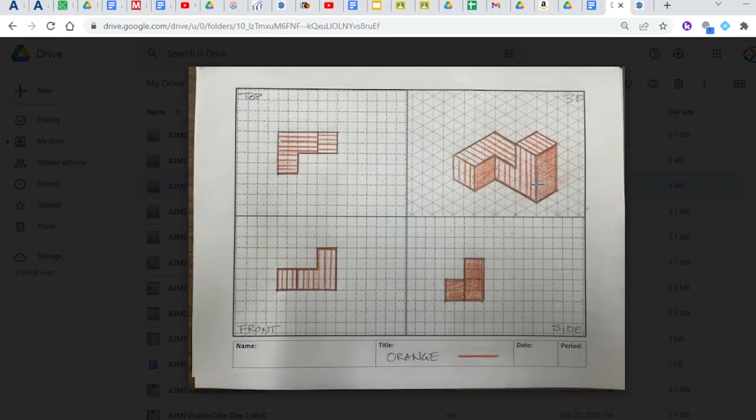I think you'll find that's probably the easiest, easier than adding. I think the subtraction method works better, and you'll see what I mean when I start doing it. So what I need to do is figure out the overall dimensions of the block. If this were just a regular rectangle, this would be 3 blocks this way and 2 blocks this way. Okay, so let's go to SketchUp.

All right, I got SketchUp pulled up, and the first thing we're gonna have to do, guys, is make sure that your measurements are in millimeters. There's a whole video on how to do that.

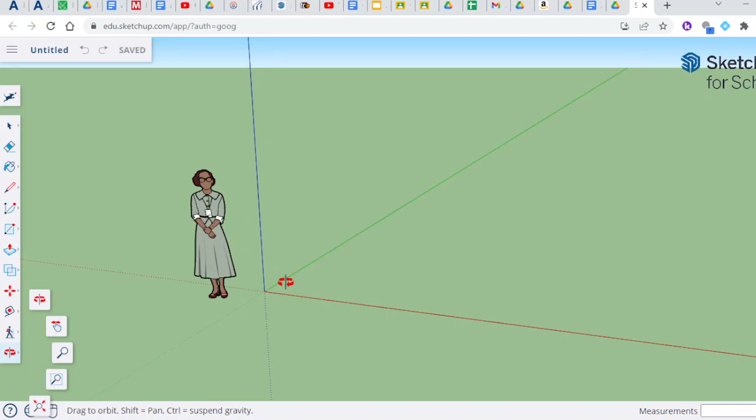Second thing you want to do is grab this orbit tool, and put it in the area where you're going to be working, which is down here in the corner. Then you want to start zooming in, and put that orbit tool in the area you're zooming to, because otherwise it will zoom you somewhere else.

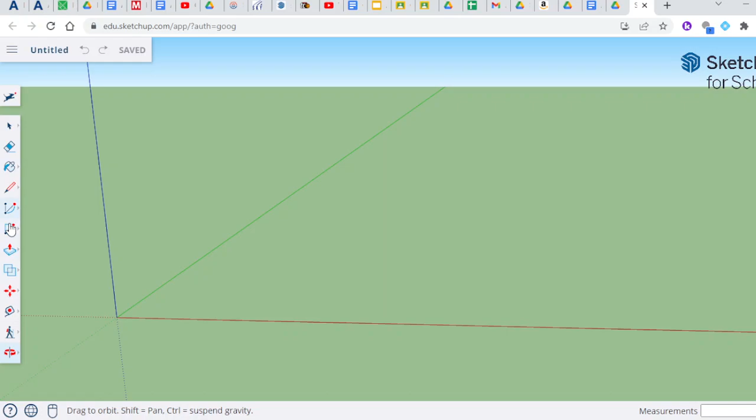I'm going to turn a little bit, go like this, move it back. We're going to keep zooming in. Now I'm going to grab my rectangle tool, put it in the corner here, move it, make sure I've got my millimeters. And I do have my millimeters.

All right, so the first piece I'm making is 3 blocks by 2 blocks. So 3 blocks is 60 millimeters, and there's 2 joints in between there, so that's 0.3 plus 0.3, that's 0.6. So I want this block to be 60.6 millimeters long going from left to right, and 40.3 going from up to down.

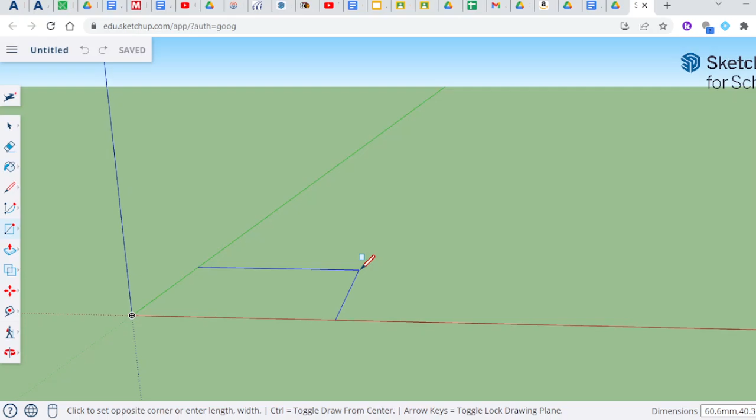So what I'm going to do is, remember when you pull on this, you just take your hand off the pad, I'm just going to put the numbers in. So I'm going to go 60.6, comma, 40.3.

Okay, and then you click enter, and this is the shape I have to work with, like if I didn't take anything out. So now the next thing I'm going to do is grab the push pull, touch it, and start moving it up, and the total height we're going to work with.

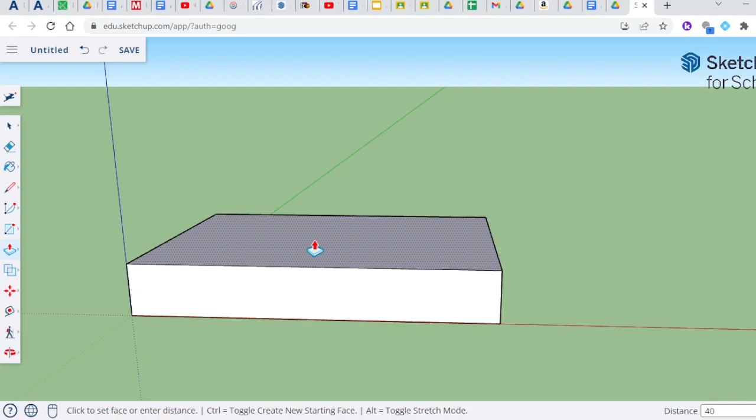This goes up a total of 2 blocks. So if it goes up 2 blocks and you have one joint between it, that's 20 plus 20, which is 40, and then that 0.3, so it's 40.3. I'm going to go 40.3 millimeters, hit enter, and we've got this block here that is freaking out right now, so I'm going to hit stop.

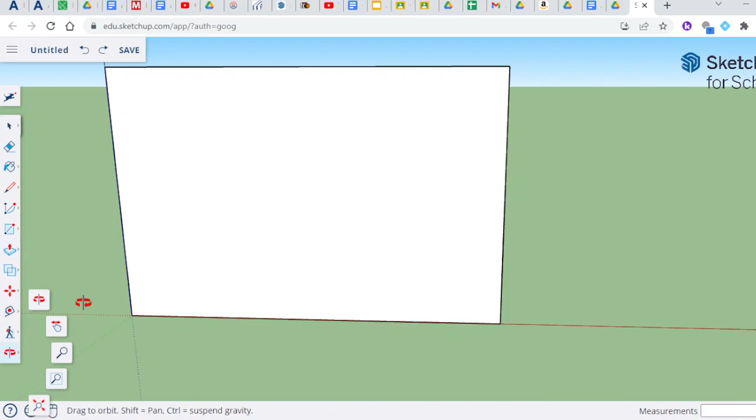I'm going to grab my pointer tool, switch over to the orbit, and pull it up like this so we can look at it. All right, so this is my block.

And if you're not sure if you made it the right size, grab your measuring tool and let's check it. I'm going endpoint to endpoint. That says oh, about 61 millimeters, right? No, it should be 60.6, right?

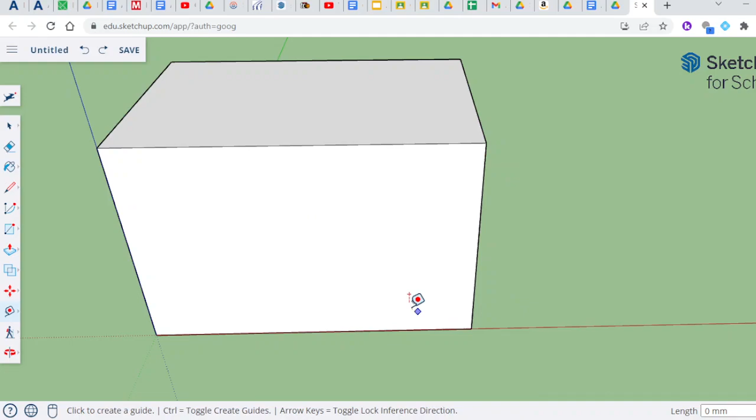Let's see, maybe it just doesn't give us those itty bitty measurements. And you go up here, this says about 40, right? Well, I know it's 40.3. I put those in, we lifted it up, everything's all good.

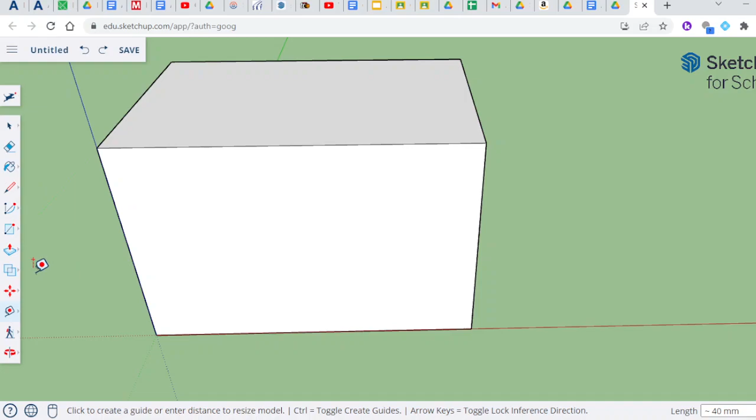So now what we're going to do is look at our shape again, and realize that it starts on the ground level right here. This is kind of my top view of what I need. I know I need nothing in here, and I also know that there's just one block sticking out here.

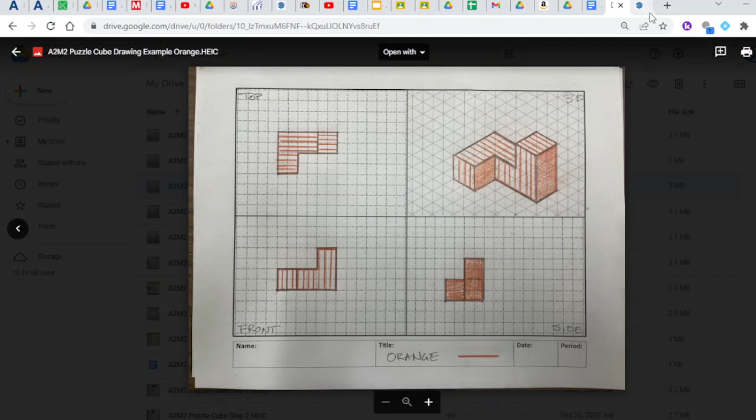So when I create this, what I'm going to do is take my pencil tool, click on it, start moving over, and type in 20 millimeters, and hit enter.

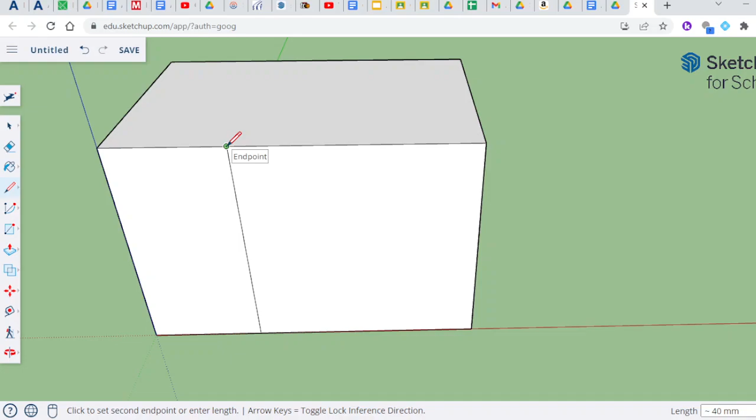And that's going to show me an endpoint right there. So I take this, click on it, and pull that down to the front. I'm going to tap on it, go back up to the top, and carry it over there.

So now I've got this kind of sections the way I need it. I know I'm going to be taking some of this out, so now let's look at the drawing again. It looks like it's one block going this way from the back, so I'm going to do that same thing, but 20 from the back.

So I'm going to go endpoint, start bringing it this way, type in 20, hit enter, find your endpoint, and carry it straight across, and make sure that thing stays red, because you know how it goes black if you move it. But if it stays red, that means it's parallel and you're in good shape.

So I'll go here, and don't worry if your lines cross and everything, we'll figure all that out and get rid of things in a second.

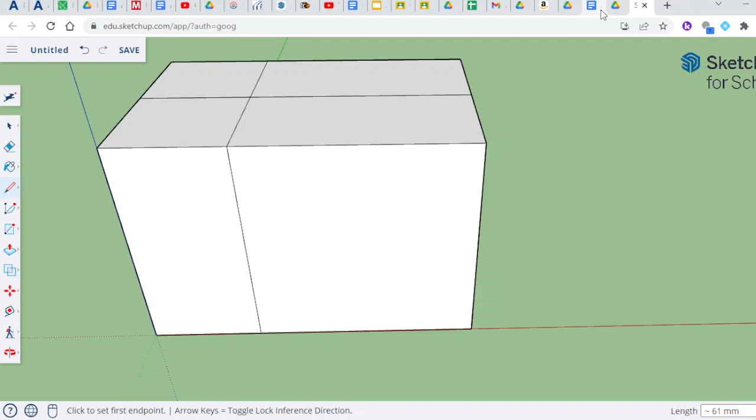Okay, so now if you look at the drawing again, you see there's nothing here, there's nothing here. So I can pull this whole piece right here and just get rid of it right away. That's what I'm going to do, I'm going to go push pull.

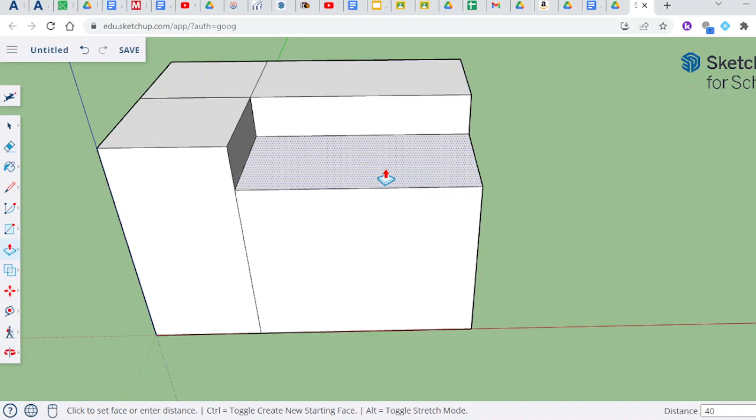I'm going to tap on this, take it and start to go down. Remember my height was 40 millimeters, so I'm going to go 40 millimeters is the distance I want to push pull it down. And when you do that, it completely wipes it out, gets rid of it.

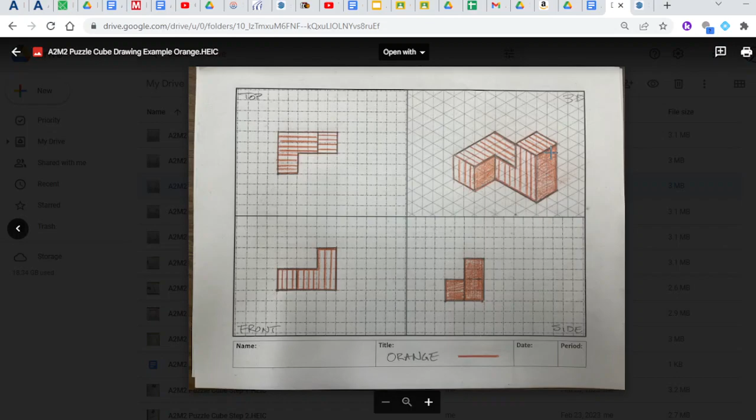All right, so we're one step closer to what we need now. Let's look at our photo again. It looks like it goes in one block here. This is 20 by 20 right here.

So I am going to grab my line tool, click here, then go over 20. I'll type in 20 millimeters, boom, and then go until I see where it's got my point. There we go, there's my endpoint. I'm going to click on it, and it should be green when I bring it across, and it is.

And then the next thing I'm going to do is take this and bring it straight down, and it should be blue this time because that's the axes.

Let's check my measurement, make sure it's right. So go from here to here, and it's 20 millimeters. So we're in good shape.

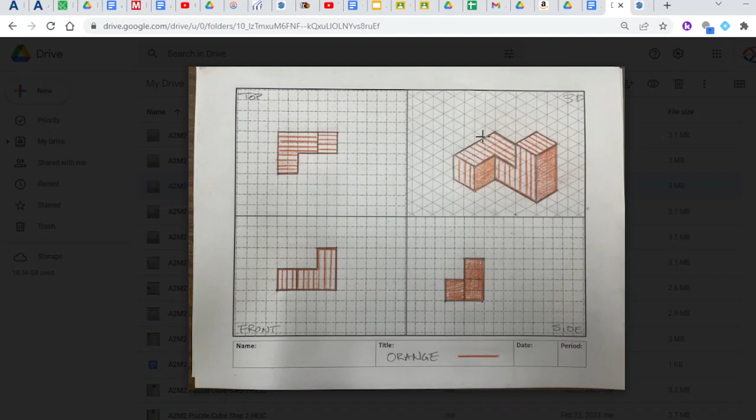Okay, so now let's look at the drawing again. We can see here that we want to get rid of all of this right here, and this is all 20 millimeters high. It looks like we've got the rest of the plan kind of set on that, so let's figure out how to do that.

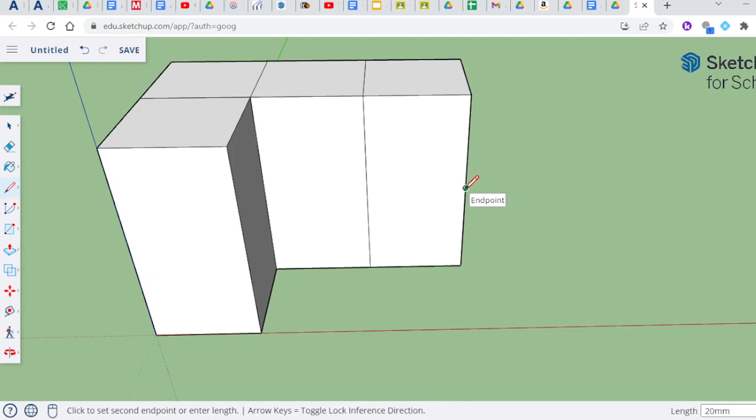So let's grab our pencil. We're going to start here, our endpoint. We're going to go up 20 millimeters because that's how high the block has to be, right? So I go up, we're going to put an endpoint here, and we're going to just take this across. We'll go right here, stop. And then we should be able to pull it this way, right? But we don't know if that's accurate or not.

So we're going to just go here, go up, and do the same thing. We'll go 20 millimeters, hit that. Take it till it comes up, puts us to the endpoint. We'll click here, go over to this, click on the edge. And now, when I click on this again, I should be able to pull it right over to this, right? And you can see it's perfect because it was green.

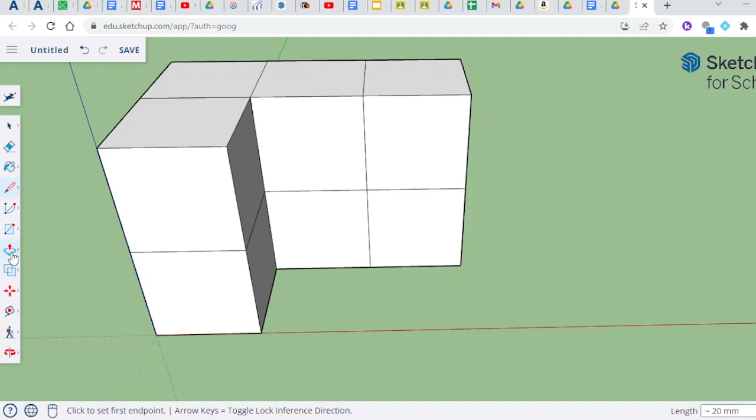So I've got enough here now where let's try the push-pull and see if we can get rid of some of this stuff. So let's take this, now this should just move this block right here. Yeah, and it does. So we know that this bottom block here has to be 20 millimeters tall.

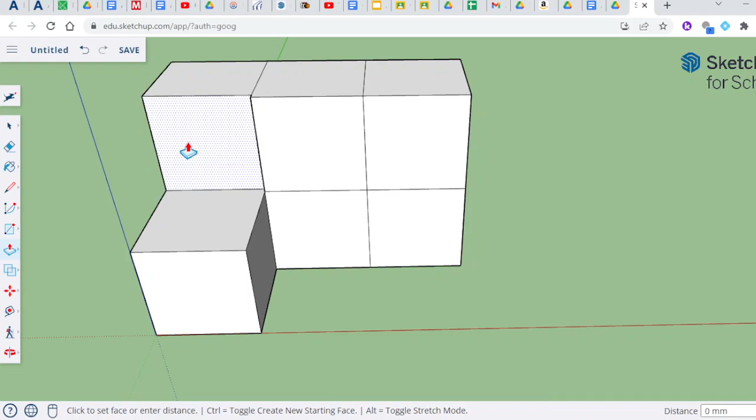And the whole thing's 40.3, so we want to go 20.3 millimeters down. And so you hit enter, and it should take us right to that line. All right, so stop on that and just hit that, right? We don't want to do that.

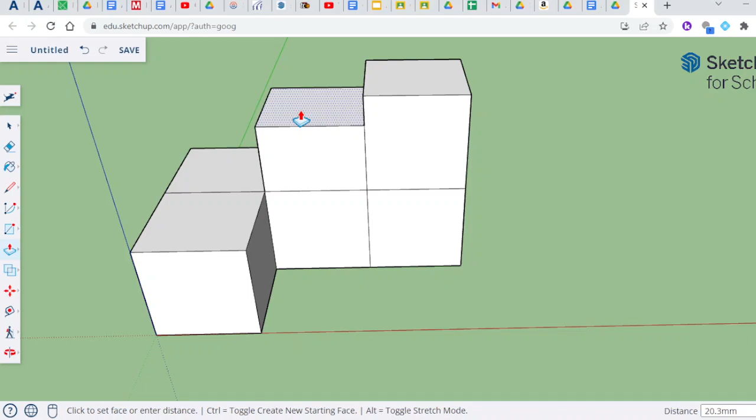And then we're going to do that for both of these, right? So just click on that, start it, hit 20.3 millimeters, tap on it, bring it down, 20.3. You got to always get it started before you put in your measurements, all right? And now we're going to hit the pointer tool so it doesn't do anything here.

Now what we're going to do is we're going to check our measurements really quick. I know this should be 40.3, so remember it's going to be silly and it's going to say, oh, it's like almost 40, right? And that's what it says. It says approximately 40 because it's 40.3.

We'll go over here. That says it's 20. That's nice, so we'll start there, and then we'll carry this over to here. And it says almost 61 because it's 60.6 and it rounds it. Okay, that's cool, I can deal with that.

Let's check this right here. So we go from there to there. This should be 20, right? And it is, so that's awesome. And this dimension right here, if we go straight across this block, should also be 20. And it is. Check this one, this should be 20. It is.

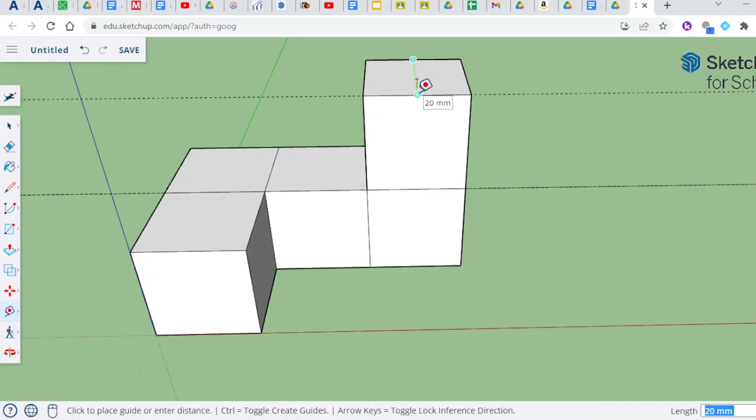Let's check this dimension right here. We can go from midpoint to midpoint. That's 20 as well. So this is what we wanted, this is the size we wanted.

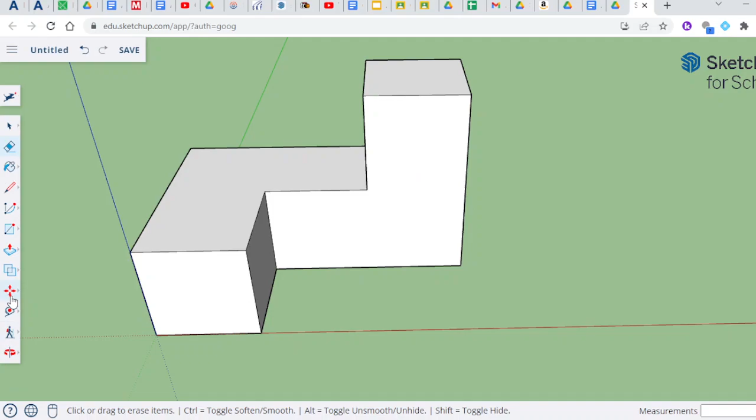I'm going to erase some of these measuring lines here. Okay, and so now what I can do, and the last thing I got to do, otherwise it's going to be weird, is I get rid of these lines. So I'm gonna come over here, get rid of you, get rid of this one right here, get rid of these two lines on the face, and then I'm going to grab my orbit tool, and we are going to go around and make sure that everything is okay.

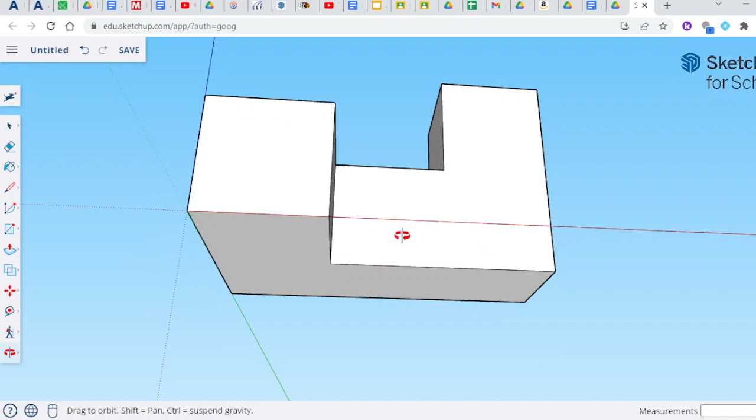Okay, that looks fine. This side looks good. Okay, go this way. This looks great, right? It looks good. Last thing you want to do is you want to go under it and you want to make sure that's solid, because if it's not, then you're going to have a problem when you print this thing, right? It's not going to look very good.

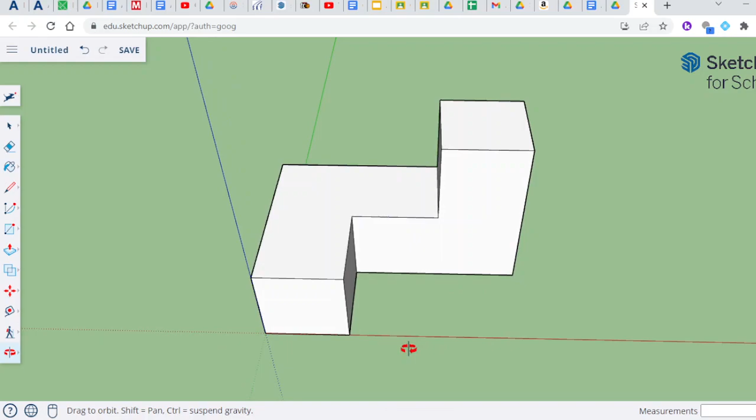And so now we've got one completed shape, right? And it really doesn't take that long once you get started on it, and you can kind of come out, zoom out a little bit, and turn it so you can sort of see it. We don't have to do anything fancy to it. You know, the measurements are right. We checked it, we got everything.

We double checked, went around it, and so this is the approach you are going to take when you make pieces on here. So you're going to have to really rely on your pictures and on what you know about the widths and lengths of these blocks, and it should be fun.